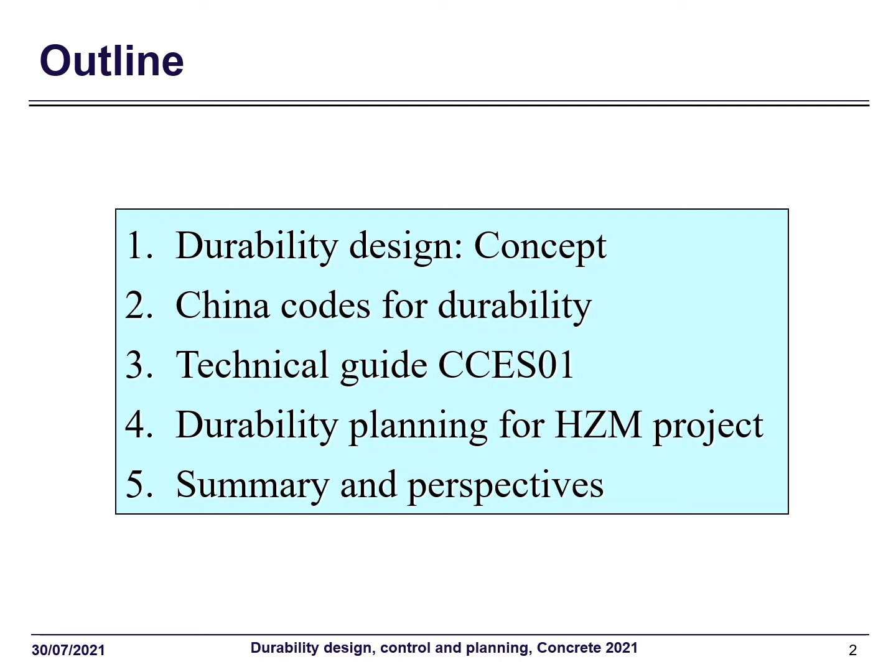I will talk about durability design, control, and planning for concrete structure from our practice in China. Here is the outline: I will begin with fundamental concepts in durability design, then continue on China code for durability, then focus on a review of a recent technical guide of durability of concrete structure called CCES01, and as an application give a brief review of the durability planning for the Hong Kong-Zhuhai-Macau Sea-Link Bridge project. In the end, I will summarize my talk.

Let's begin with the concepts. I think this figure can best illustrate the idea of durability design. Imagine when we have some durability problems, our structural performance decreases this way. Here we have a minimum acceptable level for this performance, called durability limit states. The intersection point, we can measure duration for this intersection point, that is the service life with respect to this performance. So on this figure, the three fundamental concepts for durability design are all present.

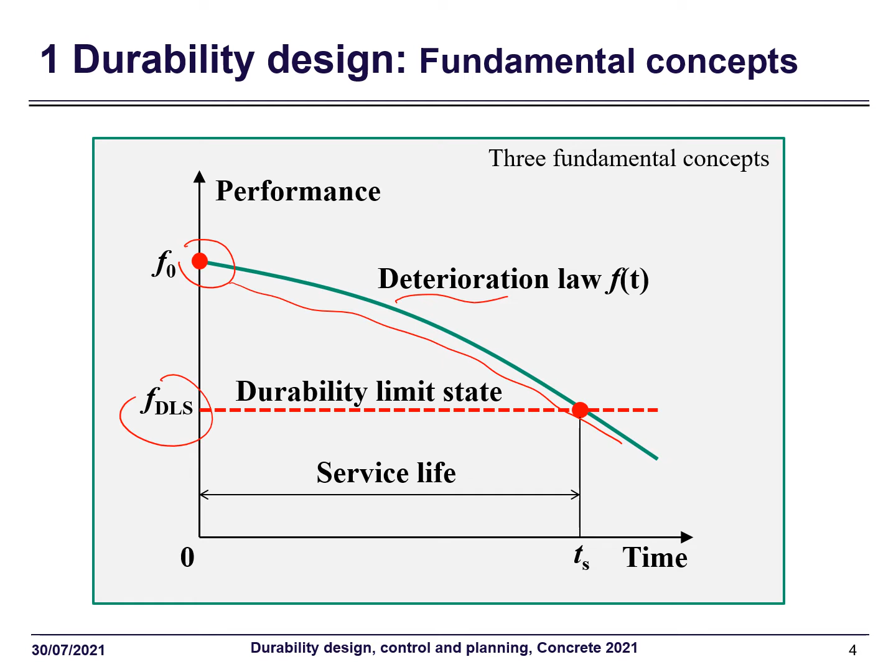That is: deterioration law, durability limit states, and service life. If we make the design, we begin with the prescription of design working life, service life. The prescription of design working life is not a pure technical issue. It is also determined by other aspects like economic consideration, legal, ecological constraint, etc.

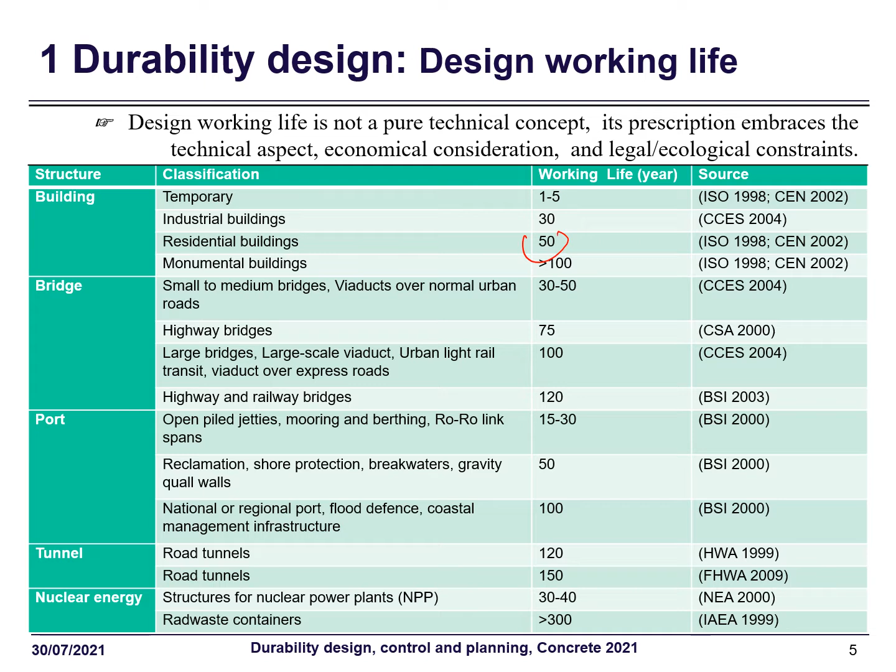On this table, I've gathered the numbers for design working lives for different civil structures from different active codes all over the world. You can see that on average we need 50 years for civil buildings, and for tunnels and this kind of infrastructure, we prescribe more than 100 years.

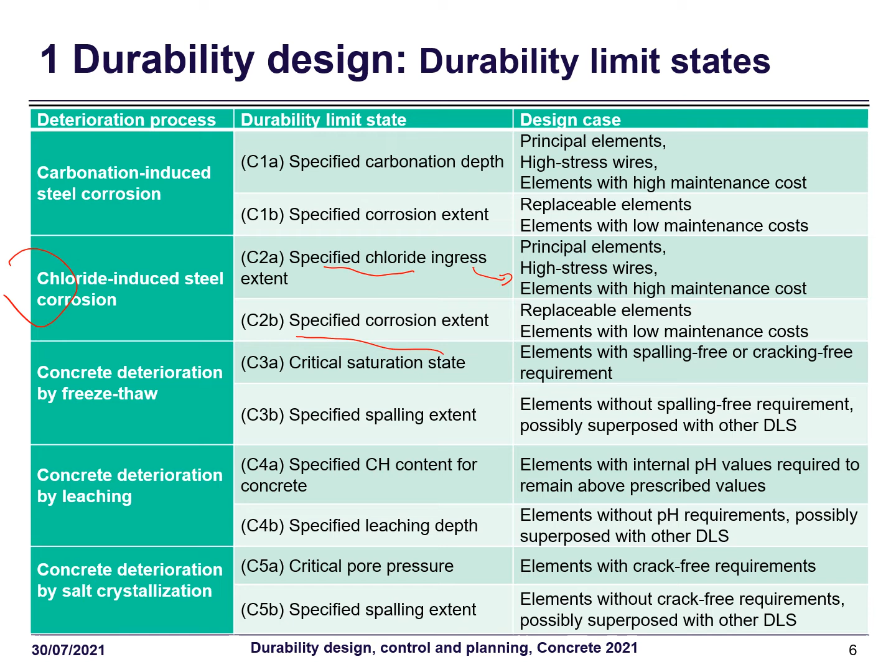Durability limits is the acceptable level with respect to the deteriorating performance. On this table, I list the possible durability limit states for main durability processes. I take chloride-induced steel corrosion as an example. You will see that normally we have an early state like specified chloride ingress extent, and a late one, specified corrosion extent. Normally the early state applies for principal elements, high stress wires, or elements with high maintenance cost. The late state is usually prescribed for replaceable elements or elements with low maintenance cost.

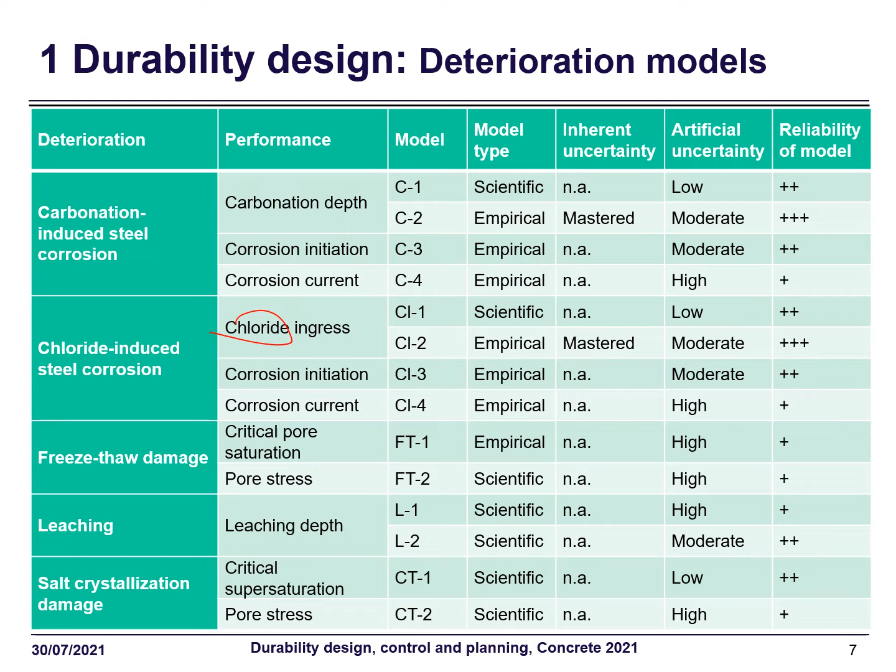And if we want to quantify the deterioration law for performance, we need models. A good model needs firstly to be correct, secondly to be quantified for its uncertainty. If we use these two criteria, we'll see that although we have a lot of models proposed in literature, reliable models are not that many. So for now, we can say that for chloride ingress and carbonation depth we have good models, not for other processes.

The approach for how to perform durability design: the first approach is prescription or deemed-to-satisfy approach. In this approach, we start with design service life, we start with environmental action classification. We do not calculate the deterioration, we just use the classification, and then we use this deemed-to-satisfy approach, normally represented by a series of tables.

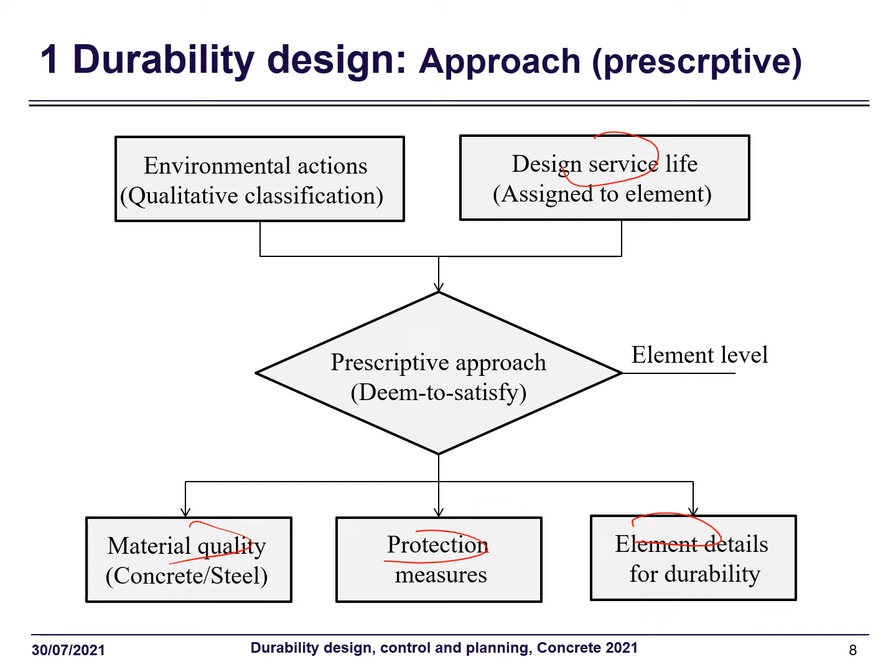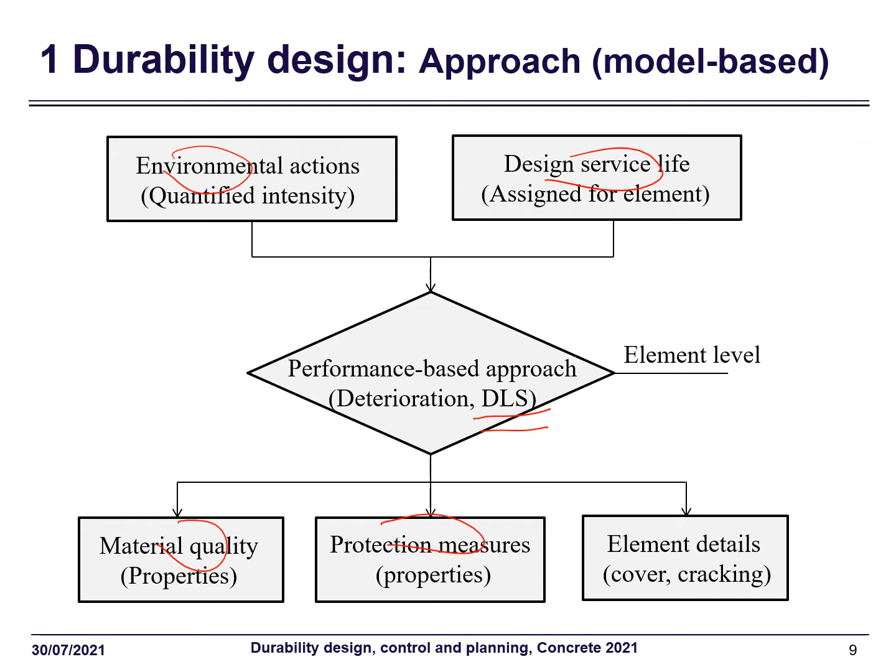From these tables we derive directly the requirements on material quality, protection measures, and element details. And if we have models, we can perform model-based or performance-based design. That is, we know the design service life, we can quantify the environmental actions, and then we use the model with respect to clearly defined DLS. From the result, we derive the material quality, protection measure, and element details.

Today there is a transition ongoing. For a long time we regarded concrete as the only valid barrier or resistance to environmental actions. But recently we have a lot more new materials, protection materials, or technical measures to protect, for example, the embedded steel against corrosion together with the concrete cover. For example, we can apply coating or sealers on the concrete surface. We can use inhibitors to reinforce the concrete cover against corrosion, and we can strengthen the concrete-steel interface, or we can use directly weathering and stainless bar to protect the steel bar.

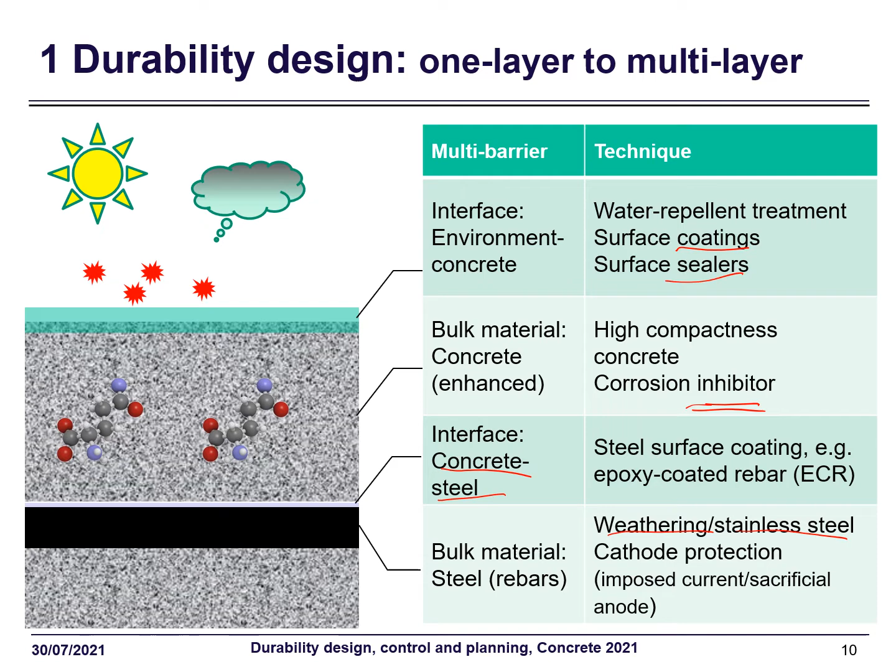So this is a transition ongoing, and we all know that to maintain the durability performance of a structure during a long service life, we need to perform maintenance works. It's very similar to DRS - we need to specify the deterioration level of maintenance, DLM. If we have a low DLM, that means we have lower quality requirement and fewer interventions. If we have a higher DLM, that means we have a high quality requirement and a lot more intervention times.

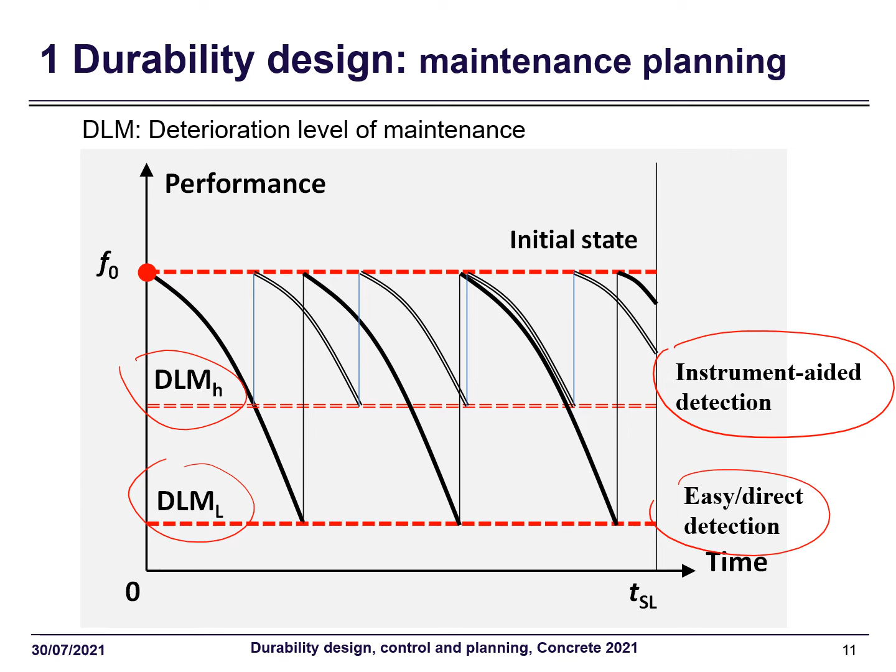Moreover, we should note that if we take a low DLM, that means at the same time it's easy to detect the limit states. If we take a high DLM, that means we normally need instruments or sensors to tell us when to start the intervention.

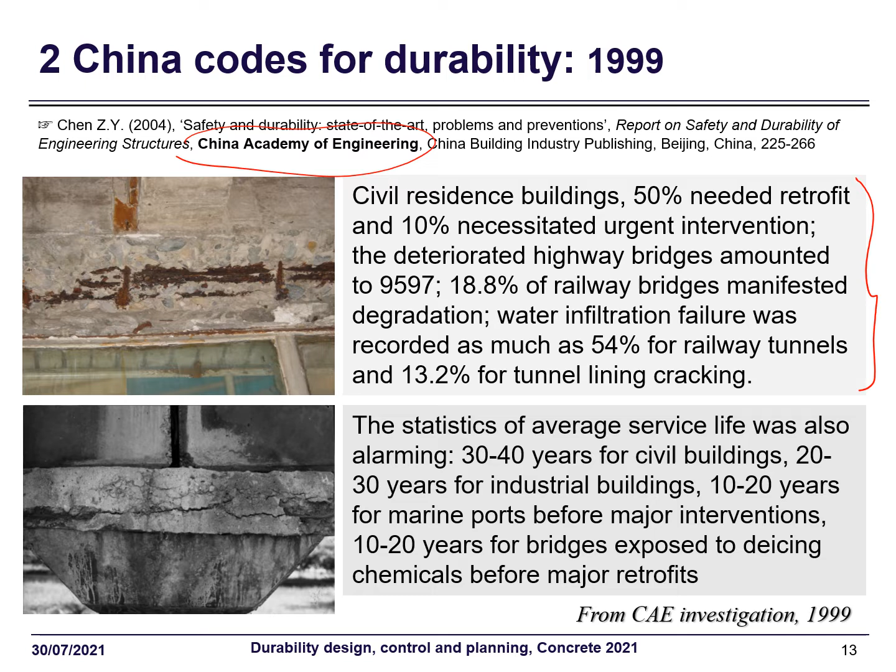And then I will talk a little bit about the evolution of Chinese codes. All the stories started in 1999. In 1999, China Academy of Engineering carried out a very serious and comprehensive investigation on the service states of all civil structures. Here are the results, I won't read out the numbers, but the situation is far from satisfactory.

The situation is also very urgent, knowing that at that time we had a very, very large scale of infrastructure to construct. So there was urgent need to increase the service life, at least for new structures. That is the reason for being of our first national guide to durability design and construction of concrete structures, CCES01. And the objective is very clear and urgent: to provide a method for durability design and technical measures in construction to increase the service life of concrete structures.

So here I list the main content of this guide. You can see it included environmental classification, service life, design procedure, requirements on the concrete materials, detailing and crack control, construction requirements, and additional protection measures. In the appendix, we have the test method for durability.

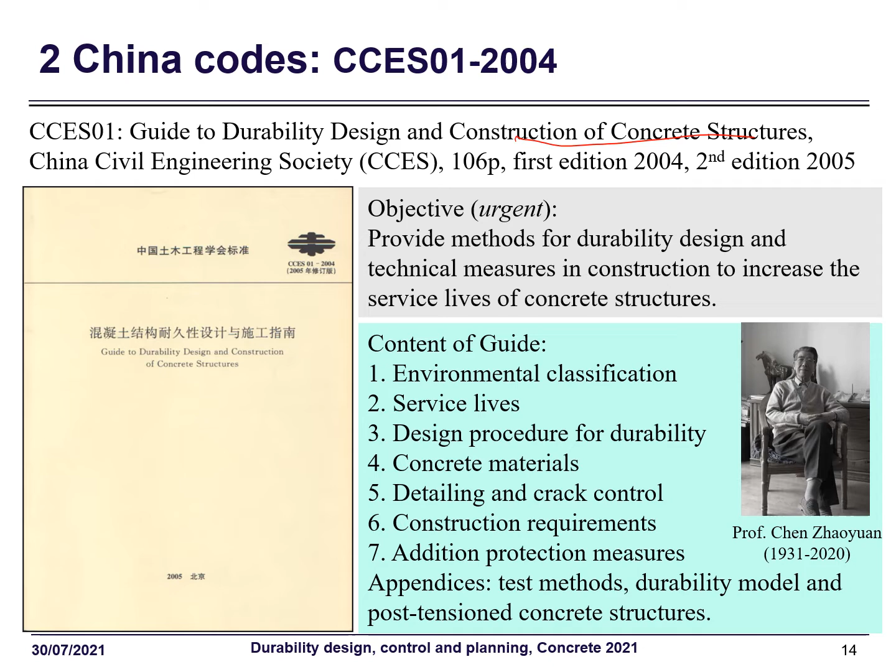And here I would like to pay tribute to one of our pioneers in durability research study and code drafting. It's Professor Chen Zhaoyuan, who passed away last year. It was him who led all the drafting of this series of codes and standards.

And soon after this guide, we formalized the requirement into a design code. That is the design code for durability of concrete structures, finished in 2008. You see that we formalized the requirement into design basis. Here we have the environmental classification, service life, etc., and the durability requirements for all different kinds of environments, and also some requirements for post-tension concrete structures.

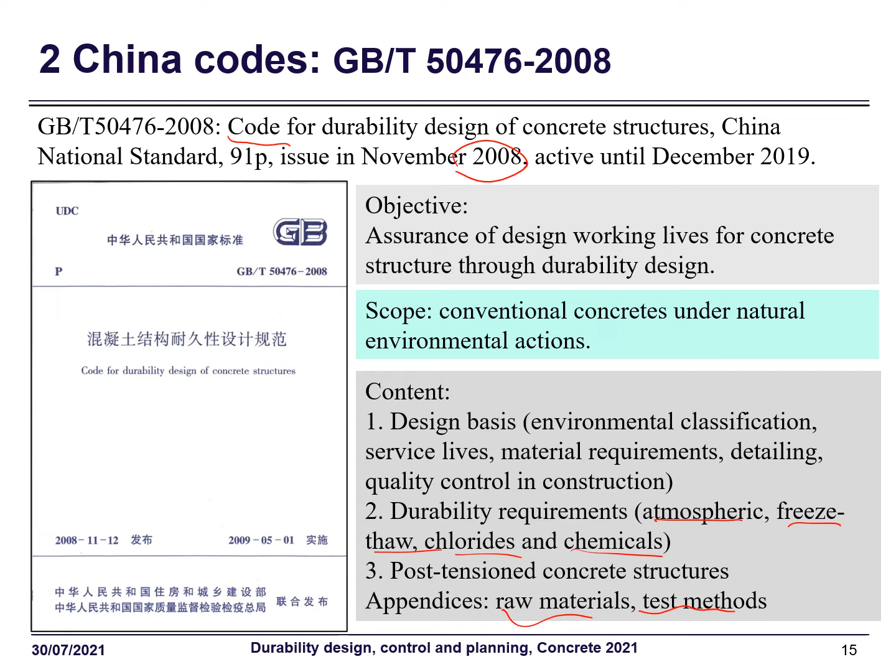So in the appendix, we have raw materials requirements and test methods. And I believe this code promotes very much the durability design work in China, and I think it contributes actually to the increase of service life of newly built structures.

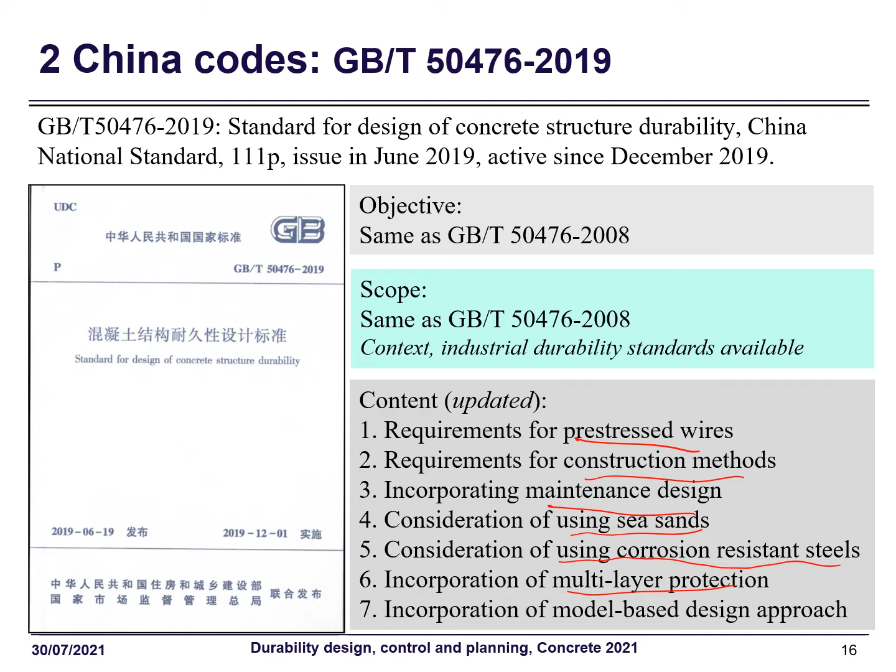After 11 years of use of this national code, two years ago we updated the content of this code with requirements for pre-stressed wire, construction method, maintenance design, use of sea sand, using corrosion-resistant steel, multi-layer protection, and model-based design approach. And after this drafting, we thought we'd turn back to the mother document of all these codes, that is CCES01.

Today, we think that instead of the design code, it's better to leave a document to provide technical solutions to durability of concrete structures. And we just finished the draft work, and in this draft we updated the specification provisions for durability on the basis of state of the art knowledge. We push forward performance-based design, and we provide a systematic solution to assure durability design working life through durability planning.

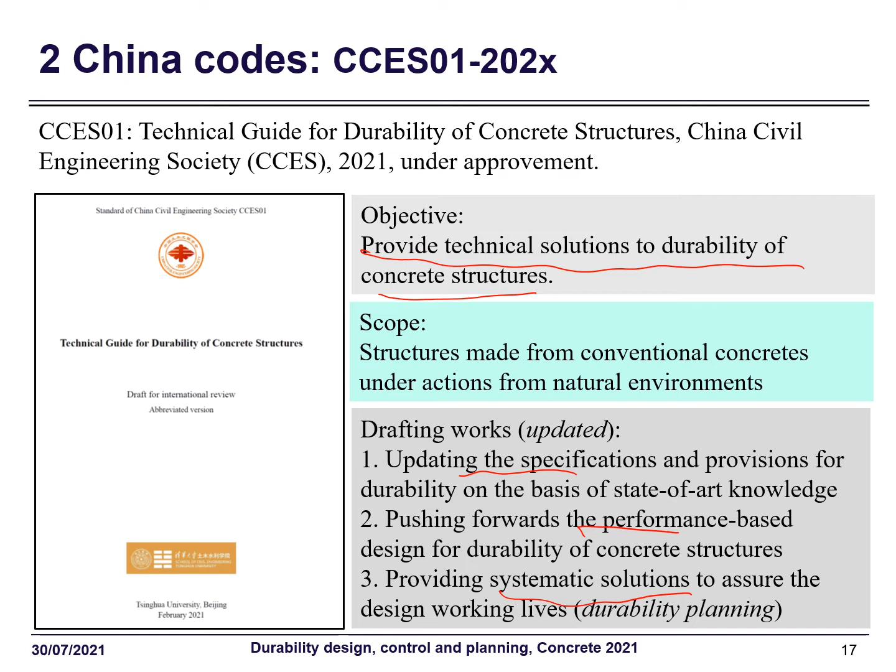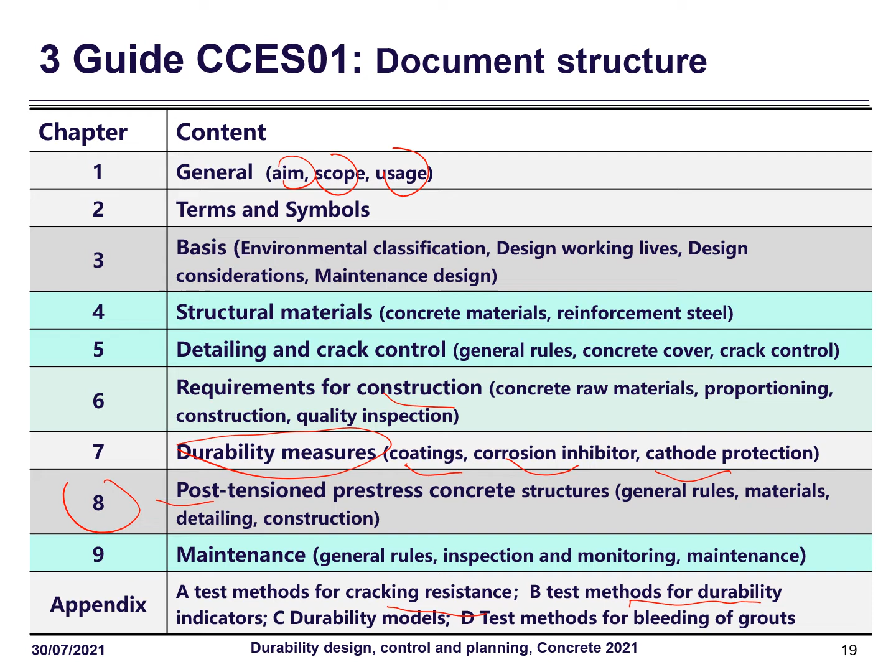And in the appendix we have test methods for cracking resistance, test methods for durability indicators, durability models, and the test method for bleeding of grouts.

In the basis, we set up a general framework to assure durability here by Article 3.1.1. That means, to assure the durability of concrete structure, we should adopt technical requirements and considerations in design, construction, and service phase. In the design phase, in durability design, we should determine the material properties, structure details, and additional protection measures, etc.

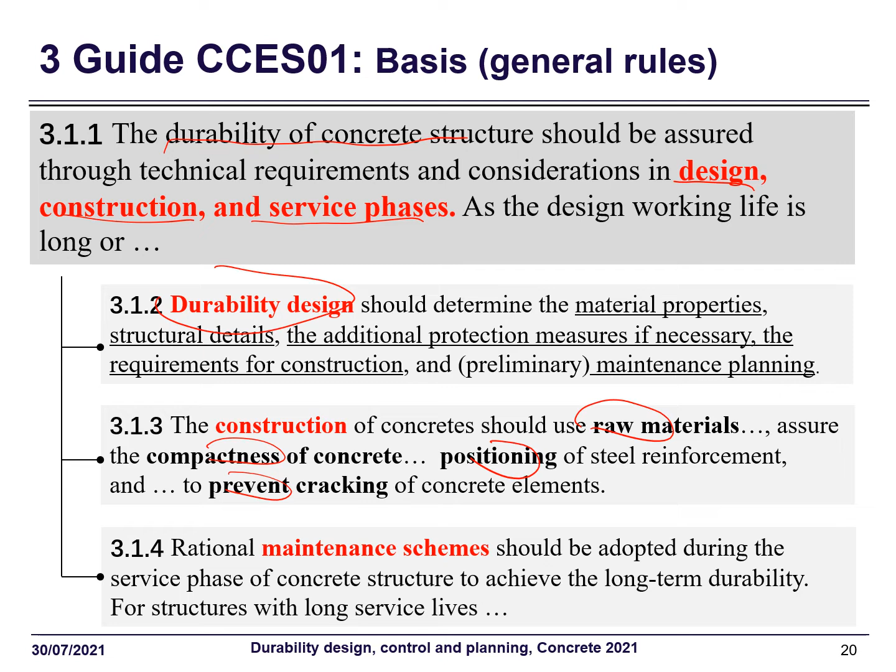And during construction, we should make quality control, especially for durability, including control over raw materials, ensuring the compactness of concrete, positioning of steel reinforcement, and preventing cracking. And during the service life, we should install a rational maintenance scheme. That is the framework to assure durability in a life cycle sense.

And then this CCES01 divided the environmental actions into 5 environments based on the deterioration mechanism. The atmospheric environment refers to steel corrosion induced by carbonation. Freeze-thaw refers to concrete damage from frost action. Marine and de-icing salt sources, or both, refer to steel corrosion from chloride ingress, but from different sources. And the chemical environment refers to concrete damage by several mechanisms, including chemicals in groundwater and soil, salt crystallization, and air pollutants.

And for each environment, we further specify the intensity of the action.

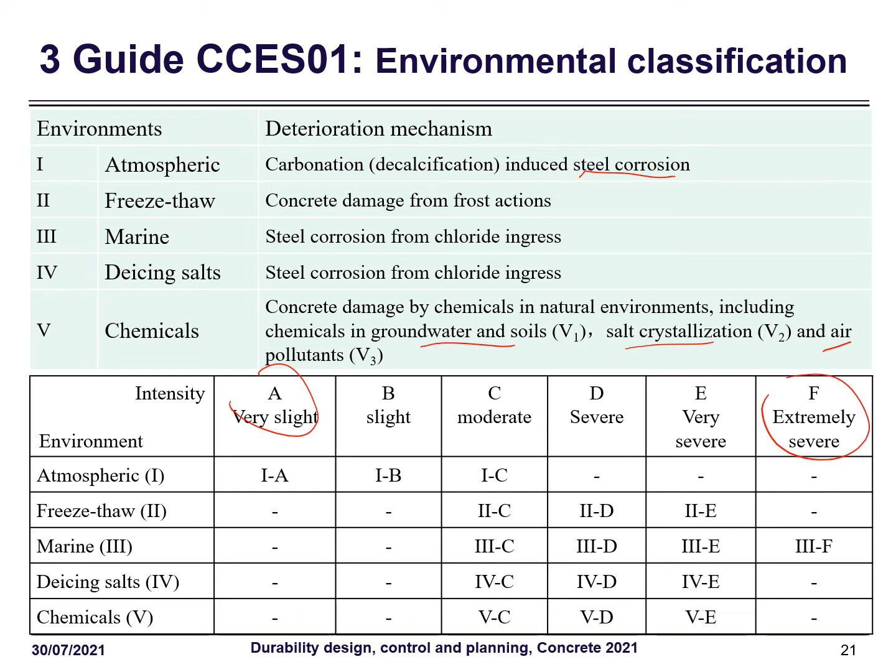The intensity has 6 classes, from A, very slight, to F, extremely severe. From this table, you can see that each environment covers 3 or 4 different intensities.

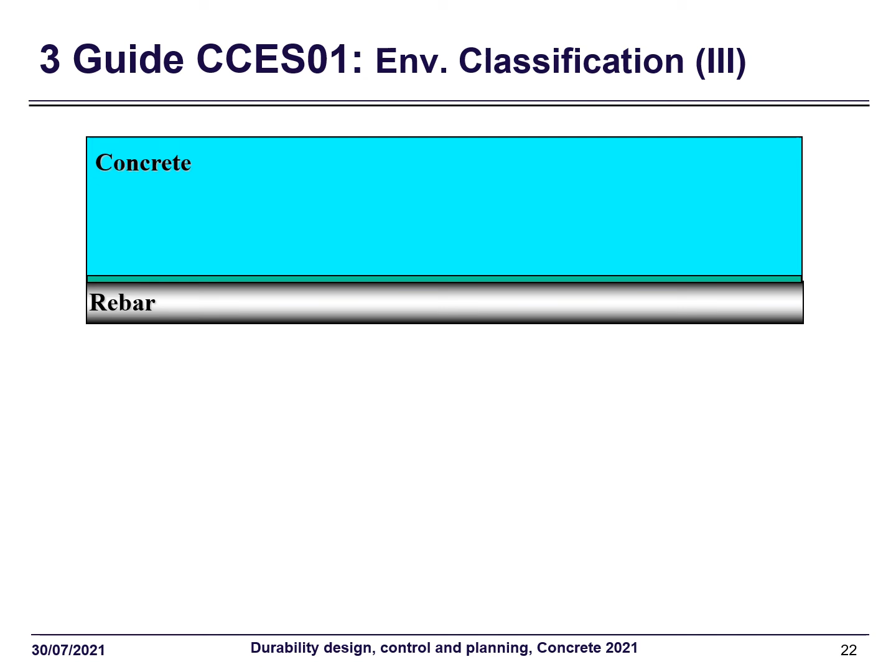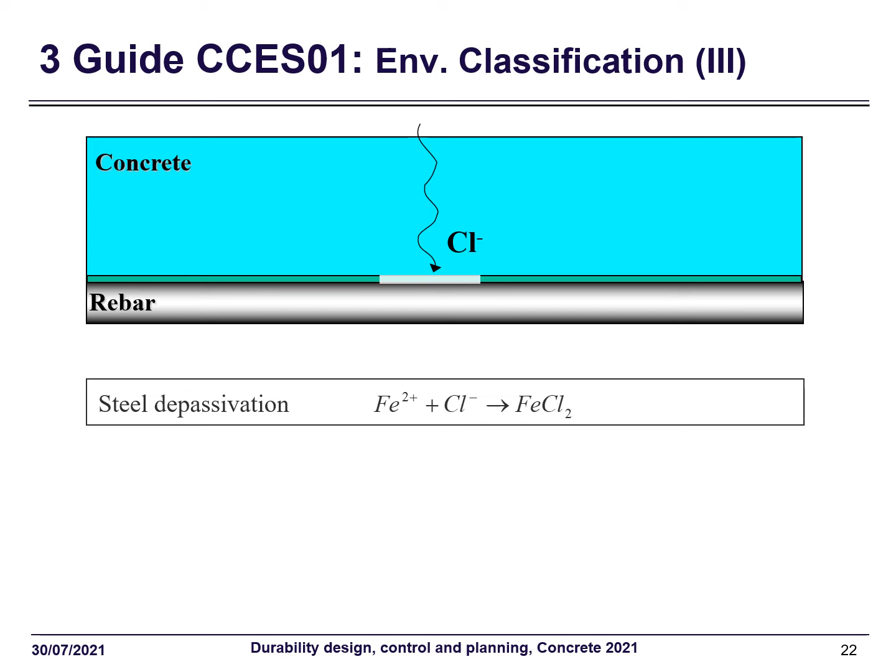I will give an example of how we quantify or assign different grades of intensity to an environment, marine environment 3, for example. We know that in this environment, the risk comes from chloride ingress to the surface of the steel bar, and then the steel becomes depassivated, leading to the electrochemical reaction of corrosion. That means we have the anode reaction and cathode reaction. To make it happen, we need some conditions: first is sufficient concentration of chloride on the steel surface, and oxygen and water to make the cathode reaction possible.

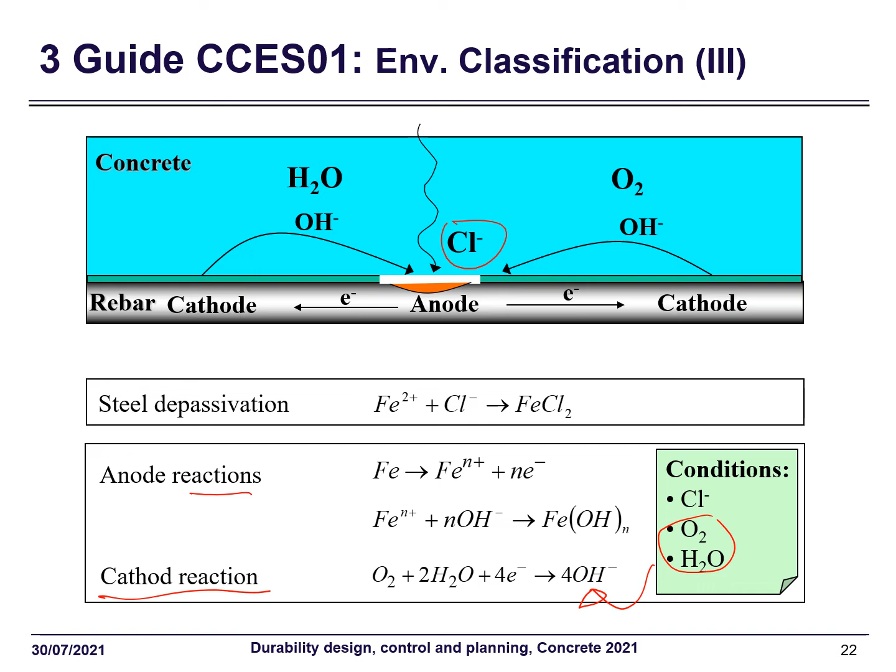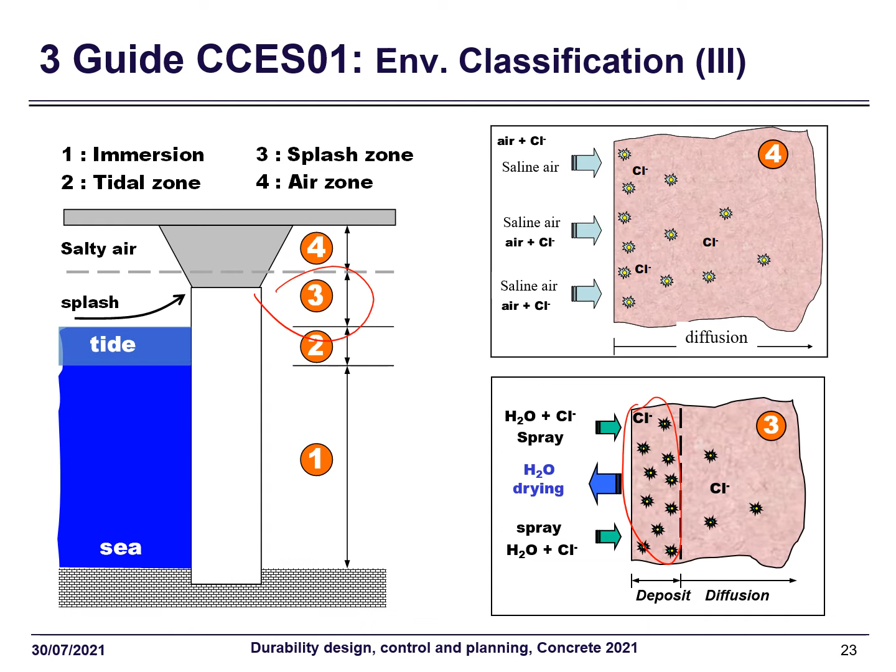If we apply this mechanism to a marine exposed structure, in the splash zone of exposure, at the surface we have drying-wetting action, leaving very high chloride concentration on the surface. In this zone we also have alternating availability of oxygen and water, which are very favorable to corrosion. On the basis of this analysis, we look at environmental factors including chloride exposure condition, humidity condition including drying and wetting, and temperature.

For example, for permanent immersion in seawater or water-saturated soils, we assign the lowest grade, III-C. It applies to a pier, bearing platform, or foundation immersed in water, because in this exposure there is very little oxygen to support continuous corrosion. On the contrary, if we have exposure to tidal splash and run, we have much higher intensity. In the tropical climate plus splash and run zone, we attribute the highest intensity, 3F.

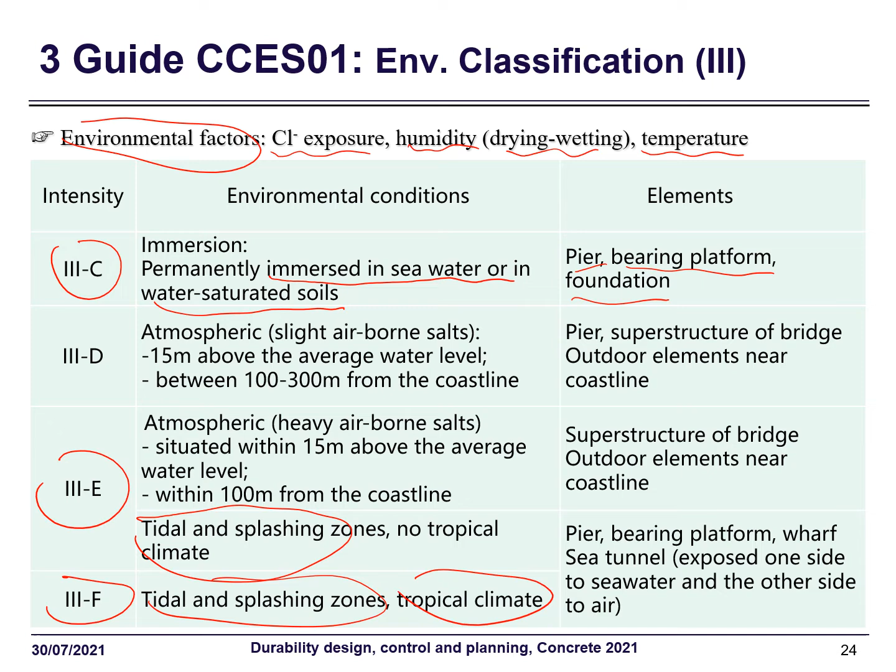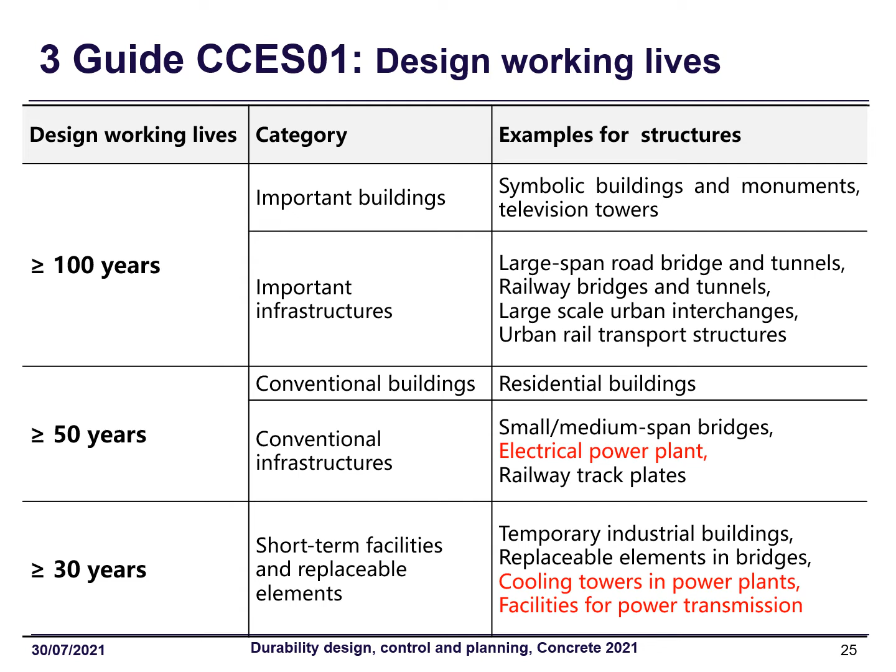For design working life, here on the table we gather the requirements on design working life for different buildings and constructions. We divided them into 3 categories: 100 years, 50 years, and 30 years.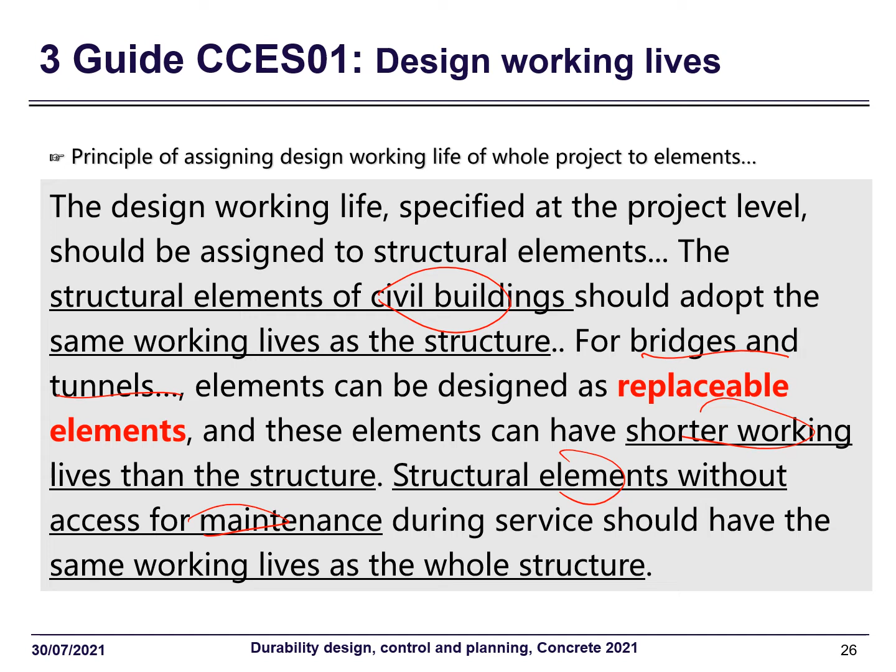For design working life, there's one remaining question: how to assign the design working life of the whole project to its elements. We think for civil buildings it's the same, and for bridges and tunnels, if we have replaceable elements, those elements can have shorter working lives. For elements without access for maintenance, which are very difficult to maintain, these elements should have the same design working life as the whole project. That's the principle.

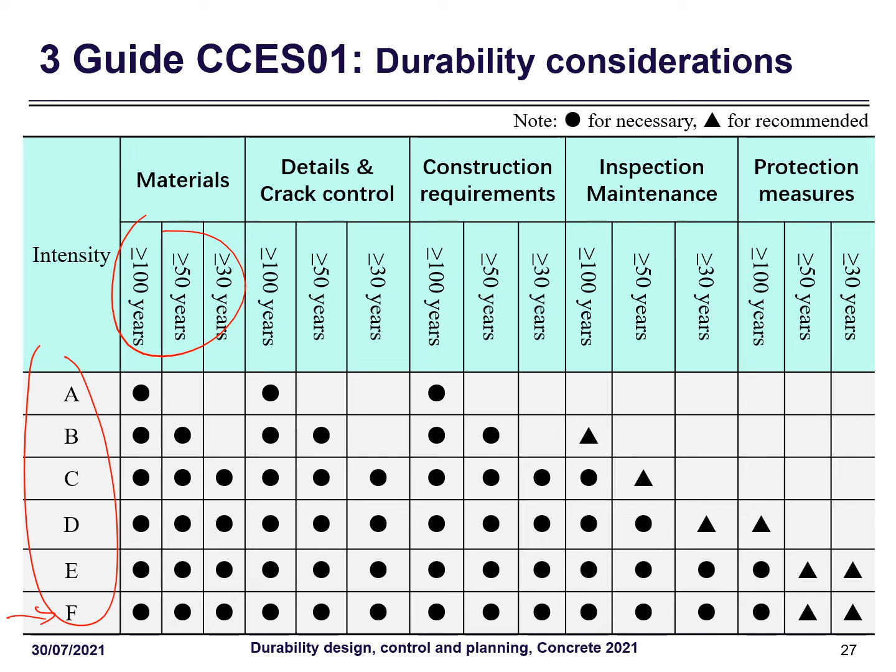The last thing we consider in the design phase is maintenance design. Maintenance is very necessary, and maintenance design should take its starting point as the end of construction. What maintenance design will do is determine the rational techniques and intervention frequency or scheme for maintenance, considering the service condition and performance deterioration of structural elements.

Here we show two cases of different intervention schemes. One is called the real-time scheme. That means if you have three groups of elements which deteriorate at different rates, real-time means whenever a group reaches its DLM, we start the maintenance.

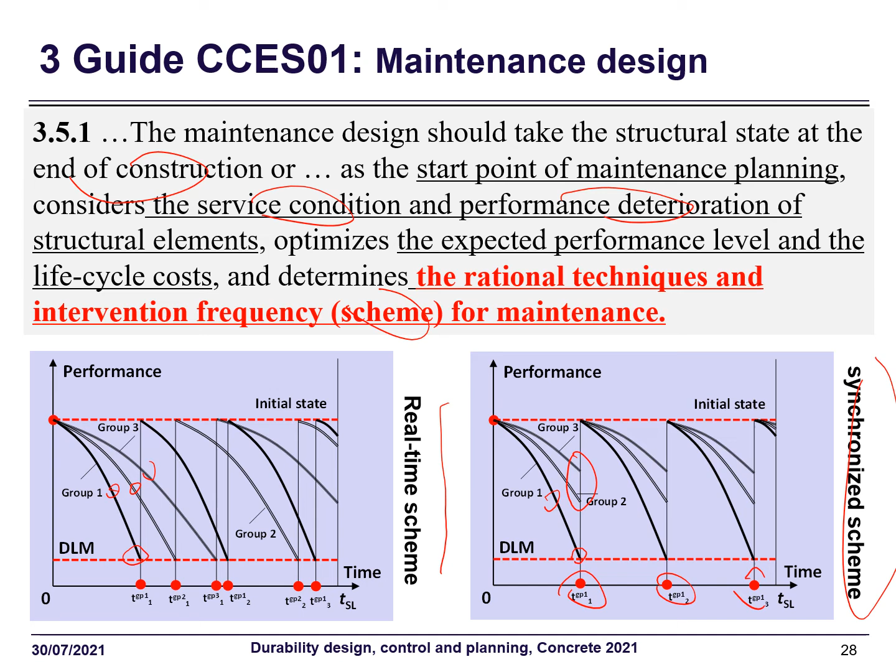The synchronized scheme is another organization. That means we look at the fastest deteriorating group, group 1. Once group 1 reaches DLM, we start maintenance for all the groups. For this scheme, we use up all the potential durability performance in some groups, while in other cases we waste a bit of the potential, but the advantage is that the intervention times in this scheme are fewer. Perhaps that's also an advantage.

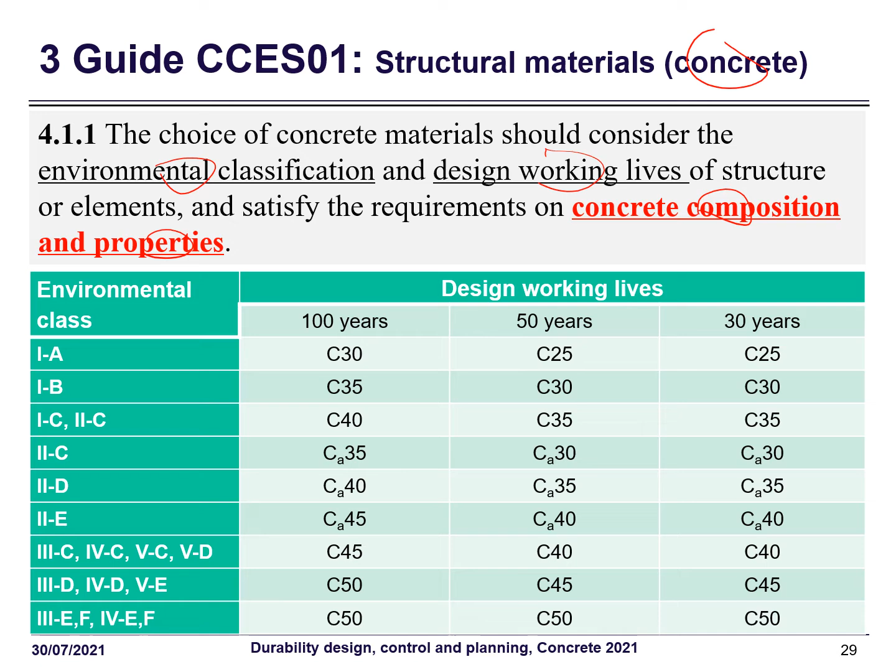We continue on to chapter 4, on structural materials. For concrete, the requirements are formulated on the basis of environmental classification and design working lives, covering both concrete composition and properties. The most important property here is the minimum strength for concrete, and in parallel, we introduce the concept of durability indicators like chloride diffusivity, water permeability, and gas permeability.

We think that whatever the phenomena of durability is, it more or less relates to gas transport, ion transport, and water transport. So whatever durability model you use after design, you can more or less transfer your requirement parameter into these three parameters.

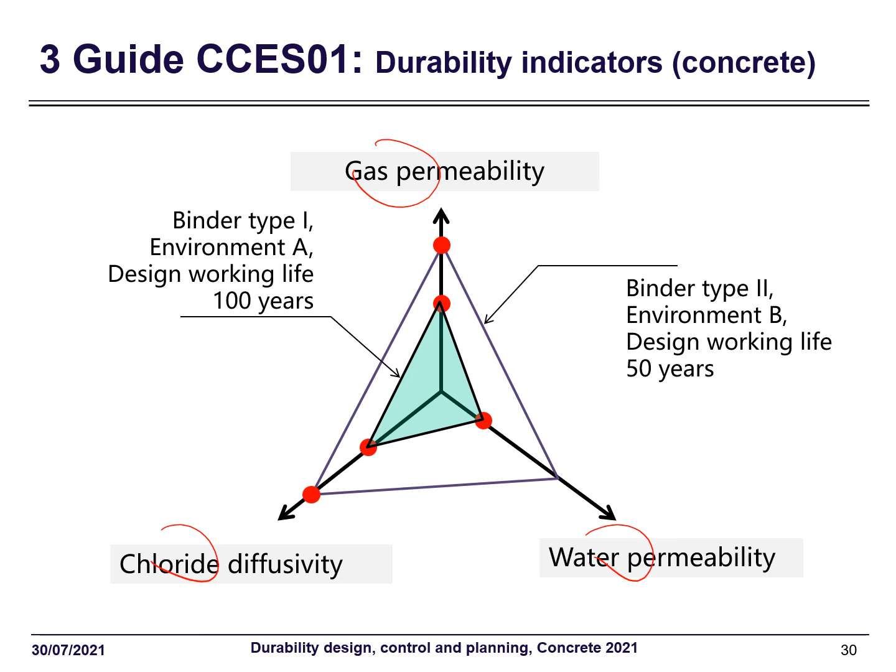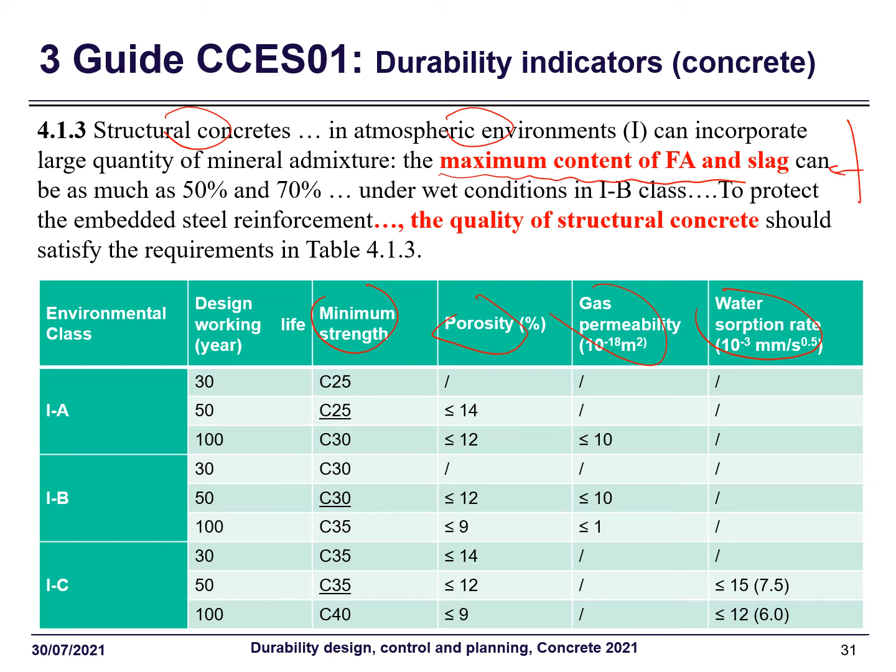Following this line, we formulate the requirements for structural concrete in atmospheric environments. On the table, you can see we use the parameters of porosity, gas permeability, and water sorption rate, plus minimum strength—that's the property requirements. In parallel, we also have requirements on composition, like maximum content of fly ash and slags. So it's a mixed approach between deemed-to-satisfy prescription and performance-based requirements.

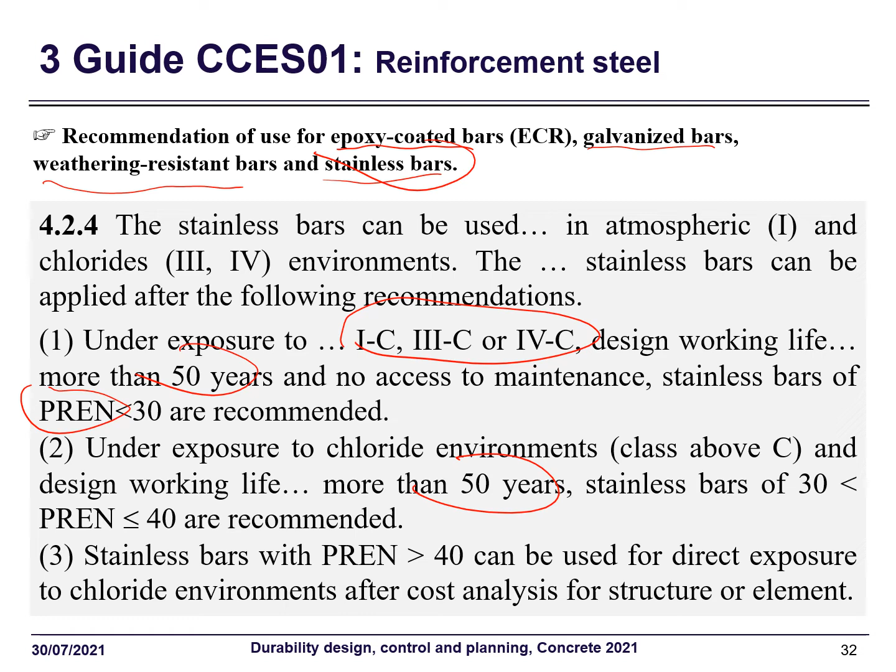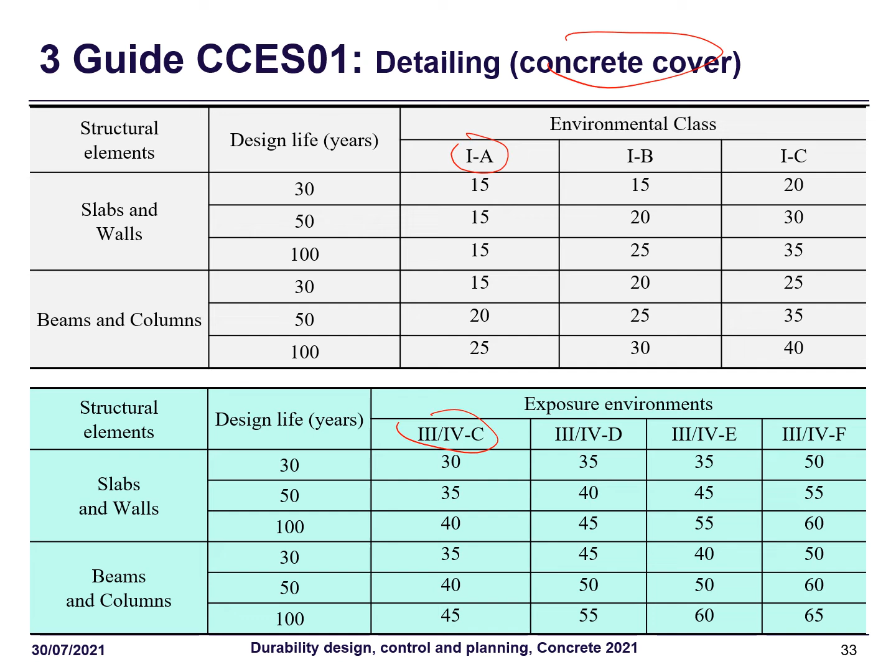And we continue on the details. The most important detail to protect against steel corrosion is the thickness of concrete cover. Here we gave the requirement on concrete cover thickness for environment 1 and environment 3 and 4. They are all related to the protection of steel corrosion. The values here are very consistent with the Eurocode requirement.

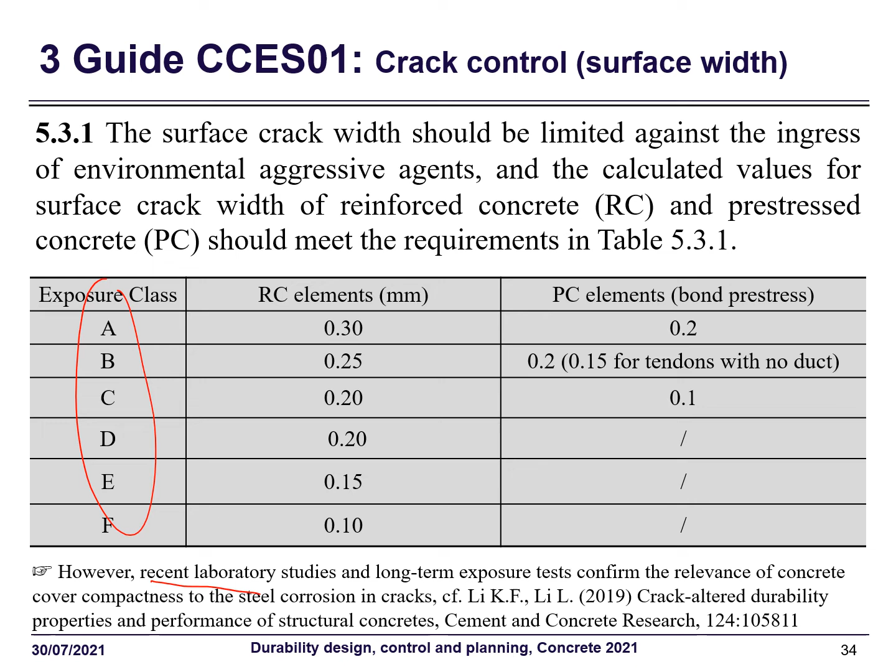Another control is the crack control with respect to durability. Here on the table, we limit the surface crack width opening with respect to exposure classes. It's also very similar to the requirements of Eurocode, but from recent laboratory study and long-term exposure test, they confirm that the crack surface opening width is not very relevant to corrosion in crack. They also confirm the relevance of concrete cover compactness. So we think that with further study, perhaps this requirement on surface opening width will not be so important.

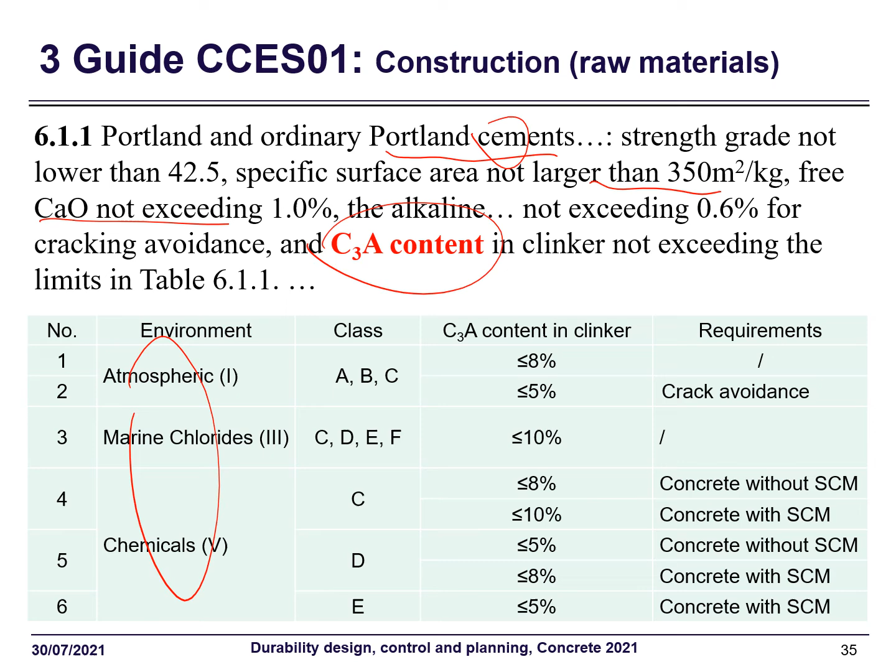And then we'll continue on the requirement of construction. On construction, first is on the raw materials. Here I give you the article concerning Portland cement. You can see that we put some requirement on the characteristics and composition of the cement, and some environmental-dependent requirement on C3A, for example, with respect to the environmental type and exposure classes.

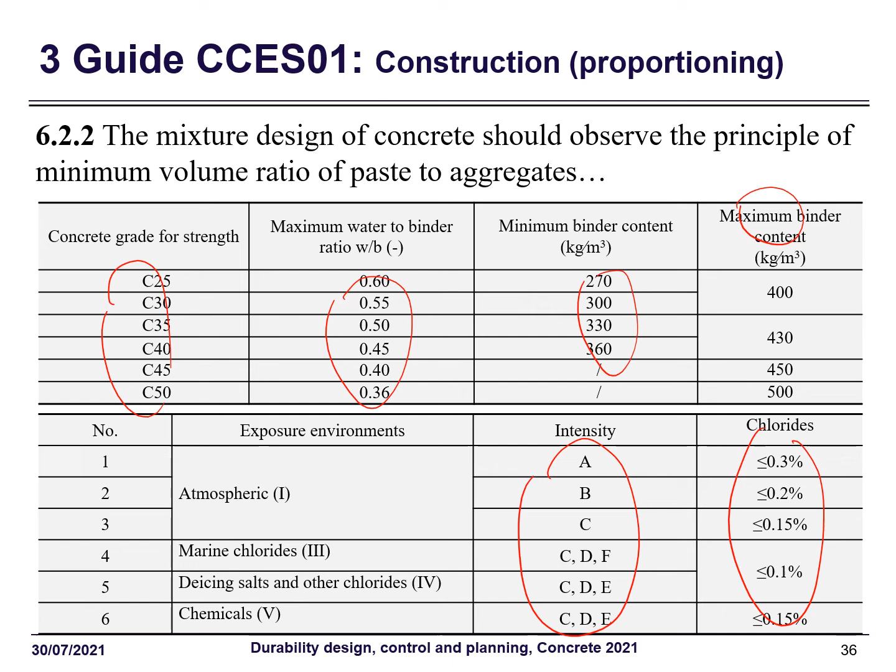And then we give some instruction or requirements on the proportioning. For example, for different grades of concrete, we impose the maximum water to binder ratio, the minimum and maximum content of the binders. We impose also the limitation of chloride content with respect to the different environmental action, type, and intensities.

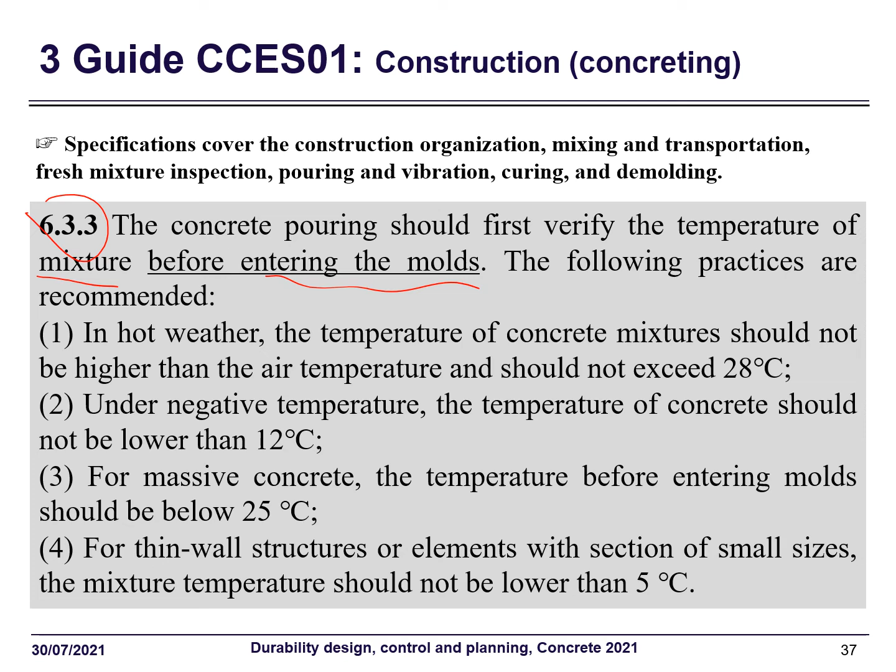And for concreting, the articles are very detailed. Here I just show you it covers from the construction organization until the curing and demolding. Here I just show you how we required the temperature of the concrete mixture before entering the mold, because it's one of the important factors to determine the early risk of cracking in concrete construction. Here you can see some temperature is given.

And then we put the requirement on construction inspection. The reason for this is, whether we use durability indicators or not, they are all parameters based on laboratory test. The real quality indicator, the most pertinent indicator, is to be measured directly on the surface of the finished members. So in that sense, we need to make the inspection of the durability quality of the hardened concrete members. In this article we just set up some basic rules to make this kind of inspection, for example, to measure the concrete cover thickness, compactness, air content, average void spacing, and some transport property.

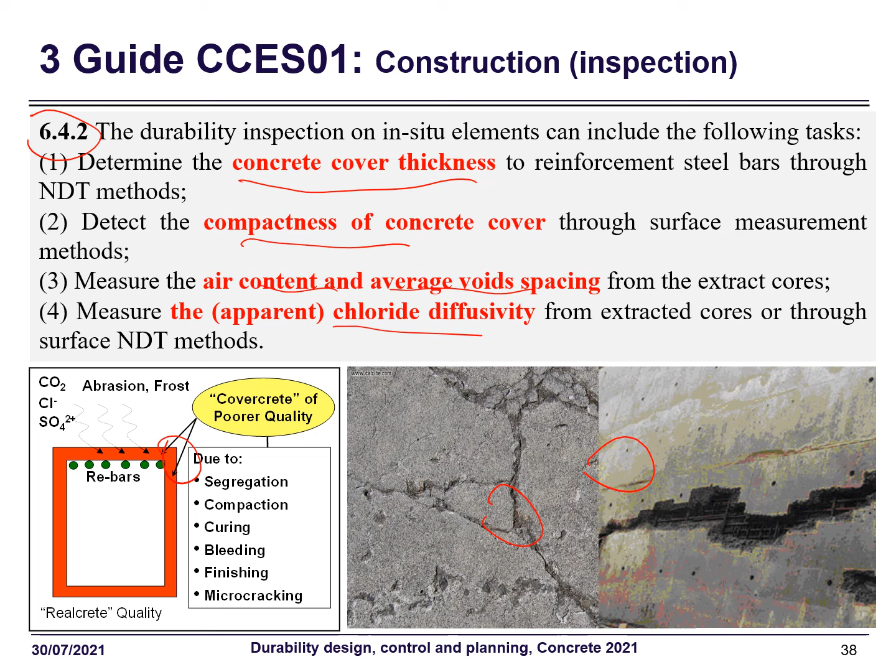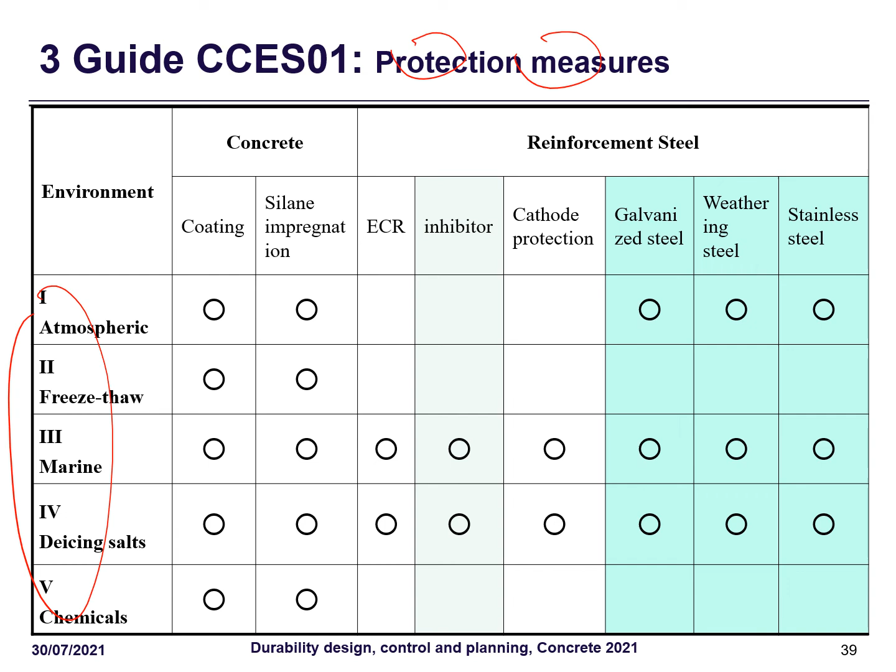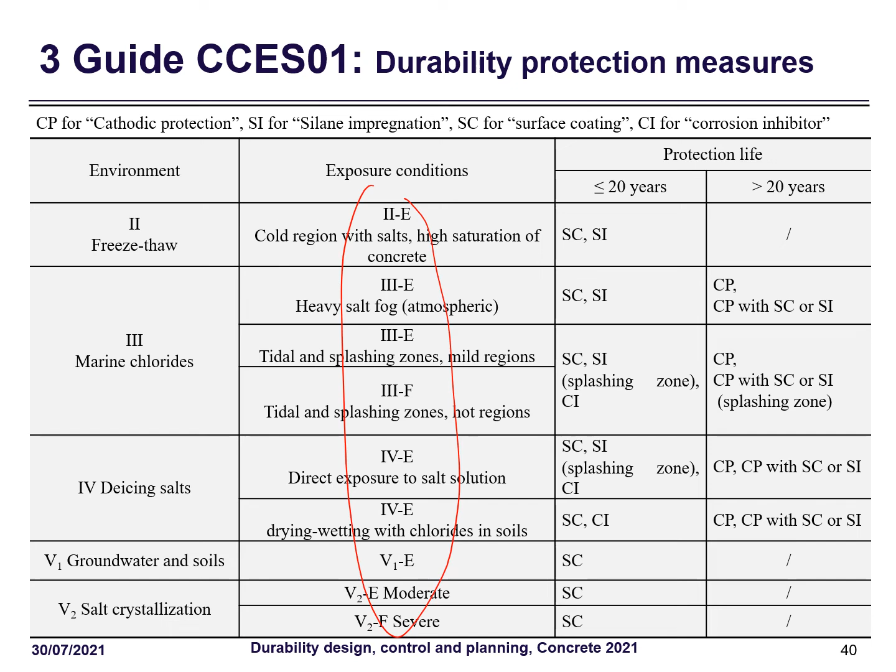And then in chapter 7, we prescribe the protection measures. That means the technical measures and materials to support the multi-layer protection in this guide. Here, in terms of the different environmental types, we proposed different combinations of possible protection in different exposures. For example, on this table, we gave the detailed possible solutions for very serious E and F grade intensity, for protection lives less than 20 years or more than 20 years.

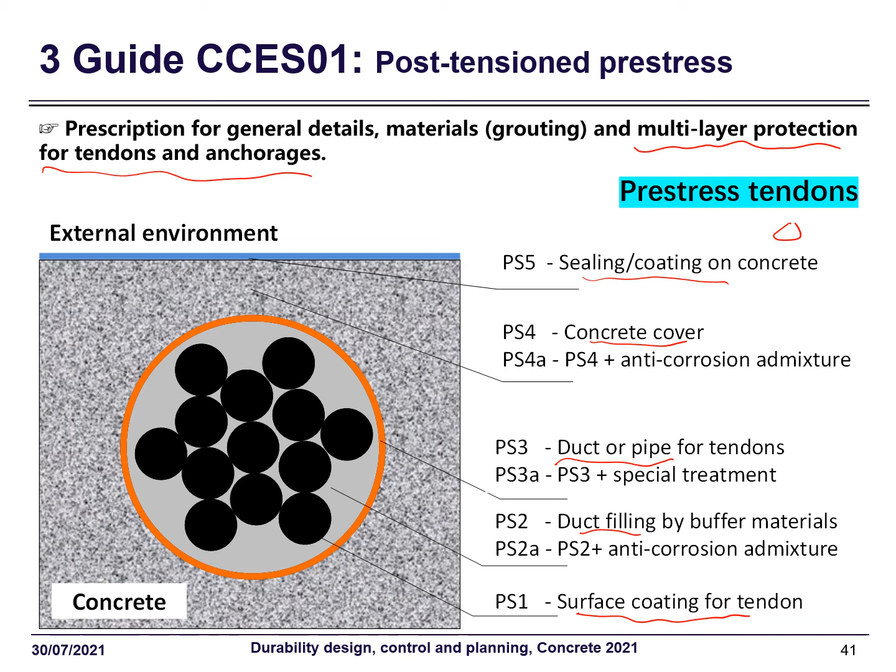These are the solutions. And in the last part, we prescribed the durability requirement on post-tension prestressed. Post-tension prestressed is special because the corrosion of this steel or strand will endanger directly the safety of the structure. So in this chapter we apply mainly the multi-layer protection for tendon and anchorage. For tendons, from inside to outside, we have respectively the protection measures as the coating for tendon, duct filling, duct or pipe, the concrete cover, and the sealing coating on the external concrete surface. On this table we attribute this combination to the different environmental classes and intensities. Generally, for the most severe exposure, you need all. For some very slight action, you need only one or two measures to counter.

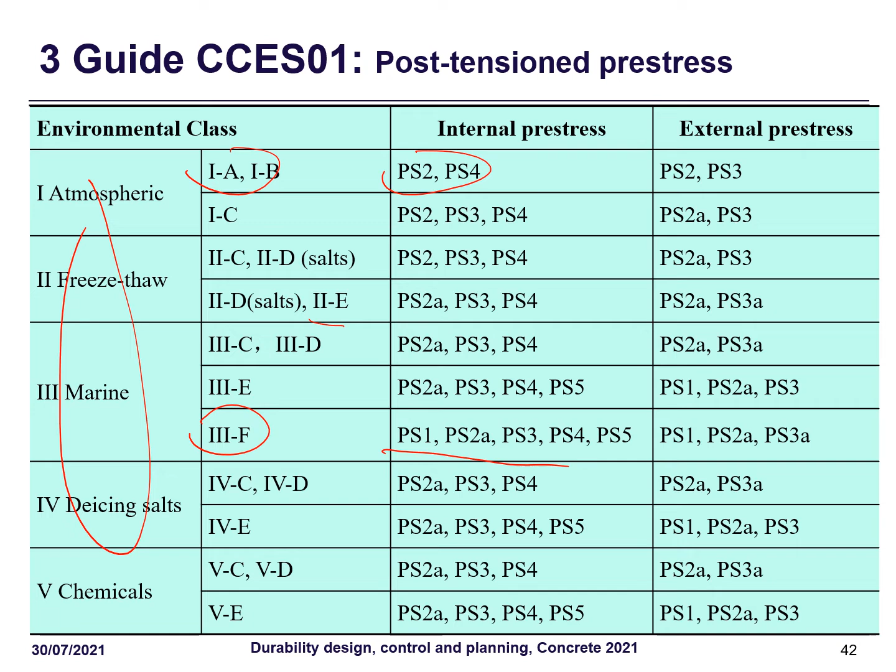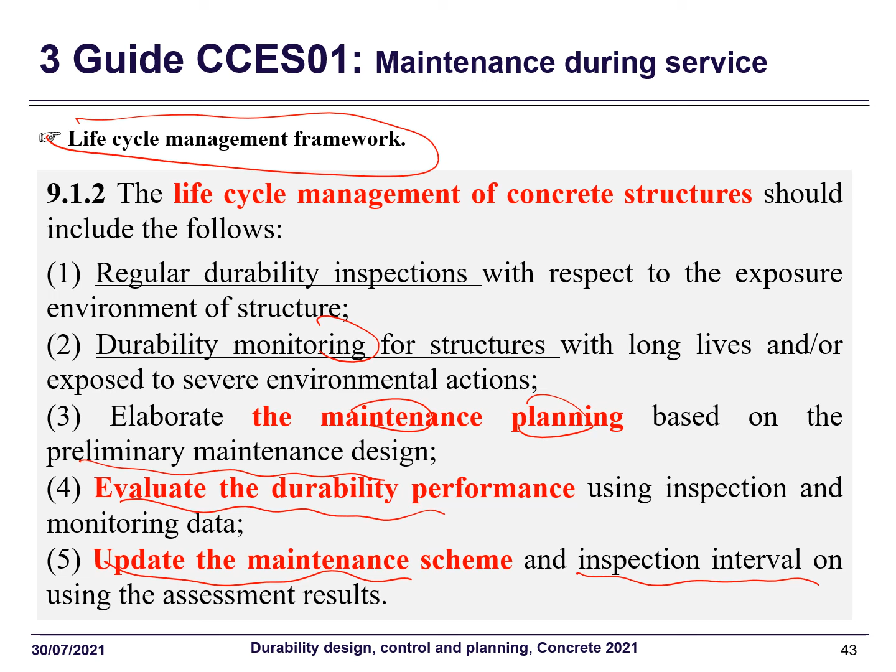So the last chapter of this guide is on the maintenance. It's written in the sense of life cycle management. In this article, you can see that the life cycle management of this concrete structure should include regular inspection, durability monitoring, and elaborate maintenance planning based on the preliminary maintenance design planning in the design phase, and evaluate the durability performance and update the maintenance scheme and inspection interval using the assessment results, which is a dynamic process.

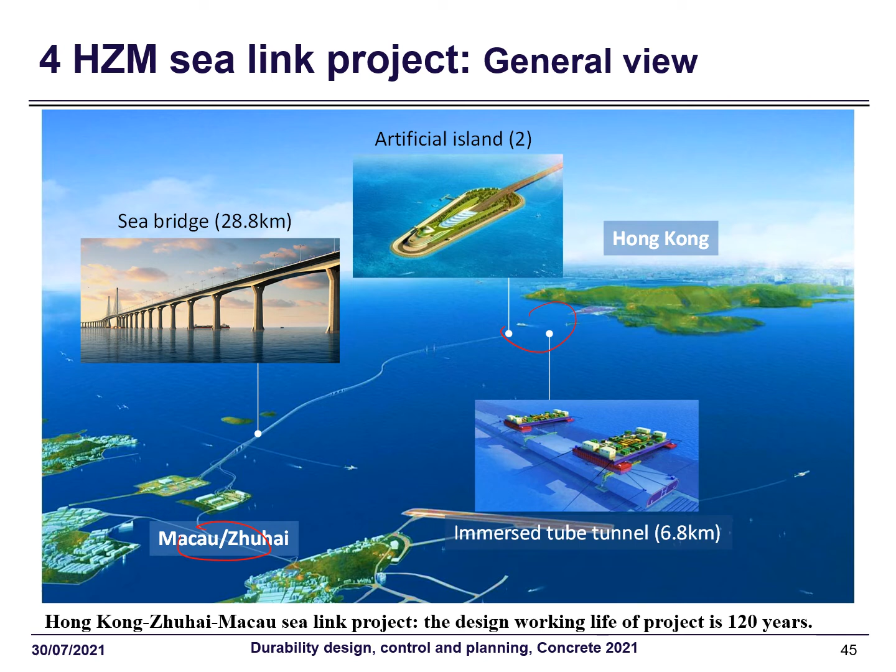So we apply these ideas to the durability planning of a large-scale sea link project. This is the Hong Kong-Zhuhai-Macau Bridge, which links Macau, Zhuhai, and Hong Kong by a huge mega project, including more than 20 kilometers of sea bridge, 2 artificial islands, and a segment of immersed tube tunnel of 6.8 kilometers. The design working life of the whole project is 120 years, and it was open to traffic in 2018. Our team was involved in the durability design of these concrete structures.

The first strategy is to divide all the durability processes into 2 groups. For the low risk groups, we control the durability risk through qualitative raw materials control. For the 2 high risk groups, we can only control the durability risk through quantitative model-based design.

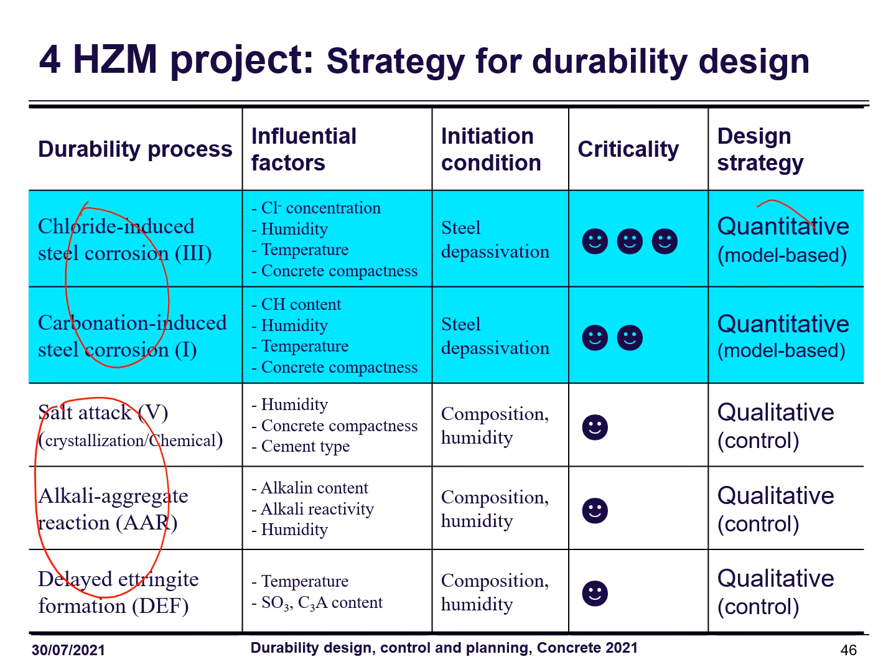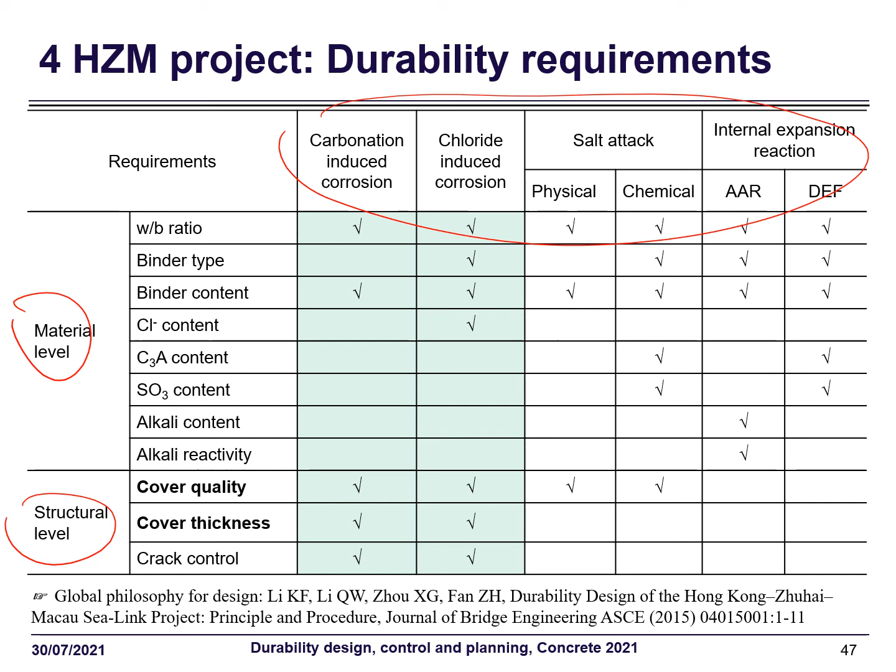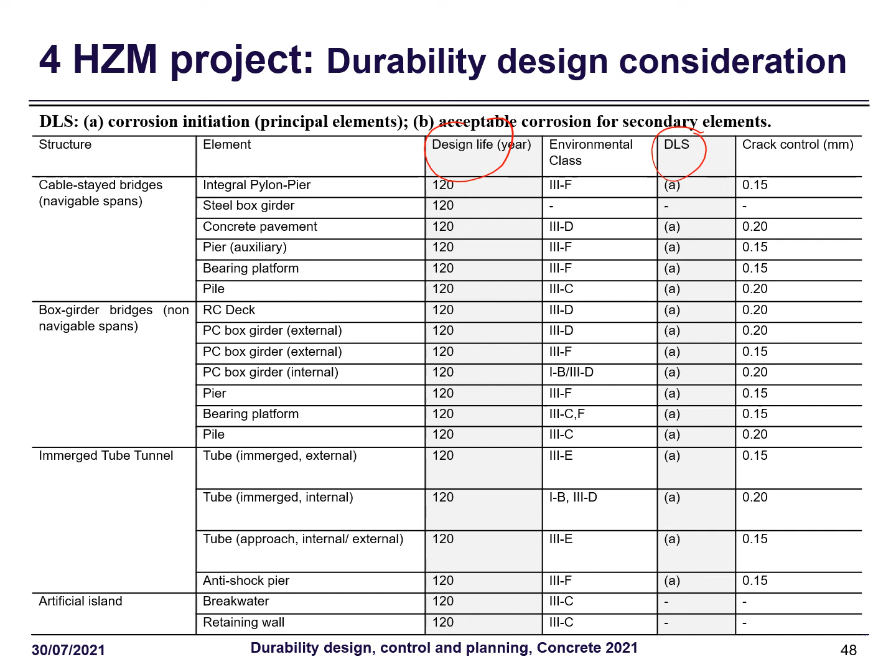Here is the durability requirement prescribed, or to be prescribed, both on material level and structural level with respect to the different processes. If we want to use a model-based approach, we need to know the design life, service life, and the DLS, and here are the choices of design service life and DLS for the main concrete elements in question.

For chloride ingress, we use model-based design. The model is like the model in DuraCrete—it's a diffusion, second Fick's law diffusion process, with an aging diffusivity, and that is the design function. But to apply this equation model to the Hong Kong-Zhuhai-Macau Sea Link Bridge, we have two problems to overcome.

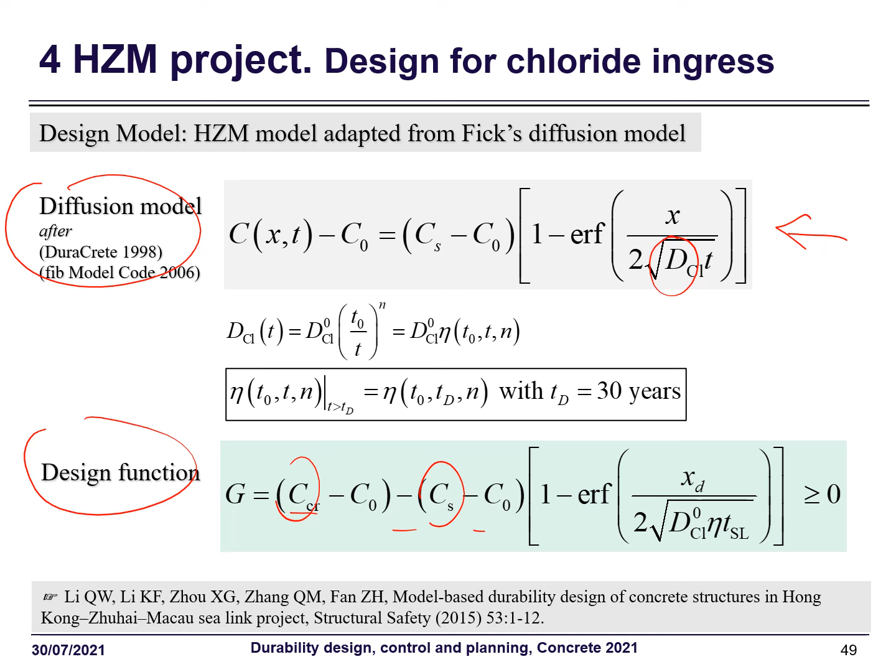The first is we have to take into account the statistical properties of all these parameters. Only in this way can we have some design margin. The second thing is these parameters are all environment dependent, so we have to calibrate this model on local data.

Fortunately, we have long-term exposure data on similar sites available to us, and using this data, we calibrate the partial factor format. We design equations from the full probabilistic formats, and here are the results.

The target reliability index is 1.3 for 120 years, and in this figure is the result—we prescribe the chloride diffusivity in terms of service life and concrete cover. Using this, engineers can continue their design work.

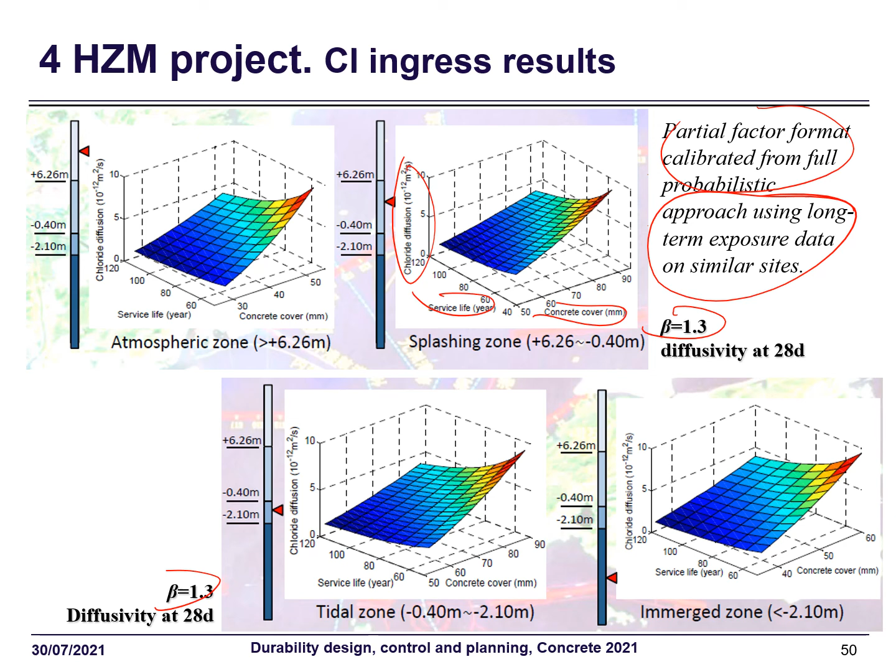When we go to the construction phase, the problem is our value from the model is the diffusion coefficient. But in the laboratory, at the quality control level, we have migration values. These two values are not equal to one another, so we have to make the conversion.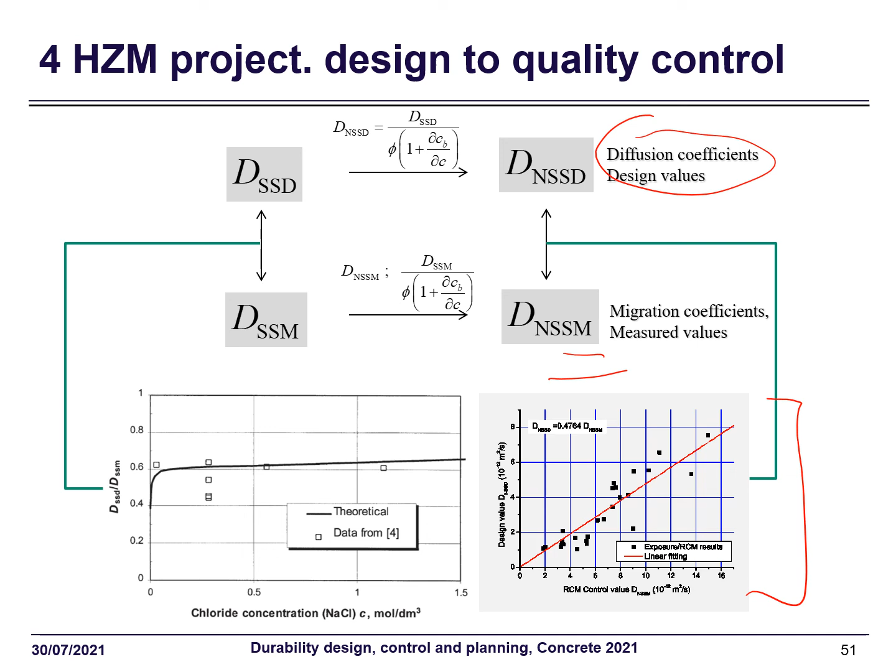That means we reconstitute the long-term exposure specimen in the laboratory, and we redo the migration test on this specimen, and we regress the correlation between the two. In this way, we can convert the design value to a quality control value.

During construction, we collect all kinds of data for concrete cover and chloride diffusivity. We use the same model to update, or to make the durability assessment during construction. Here is the result—you can see that it's always within the design margin.

The only thing is here we have an accidental consideration case. It's not a normal working case—it's a little bit higher. This is the accidental case.

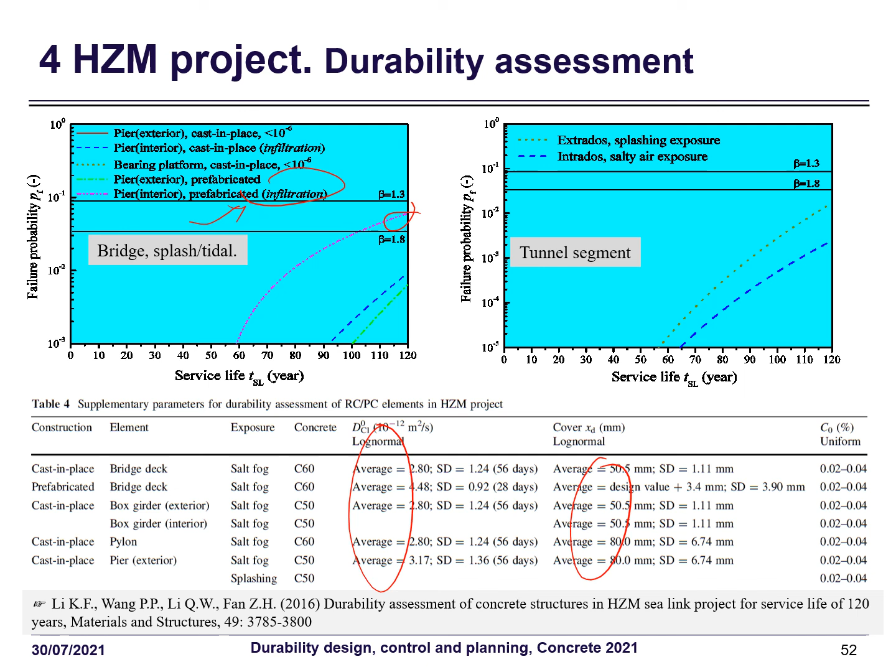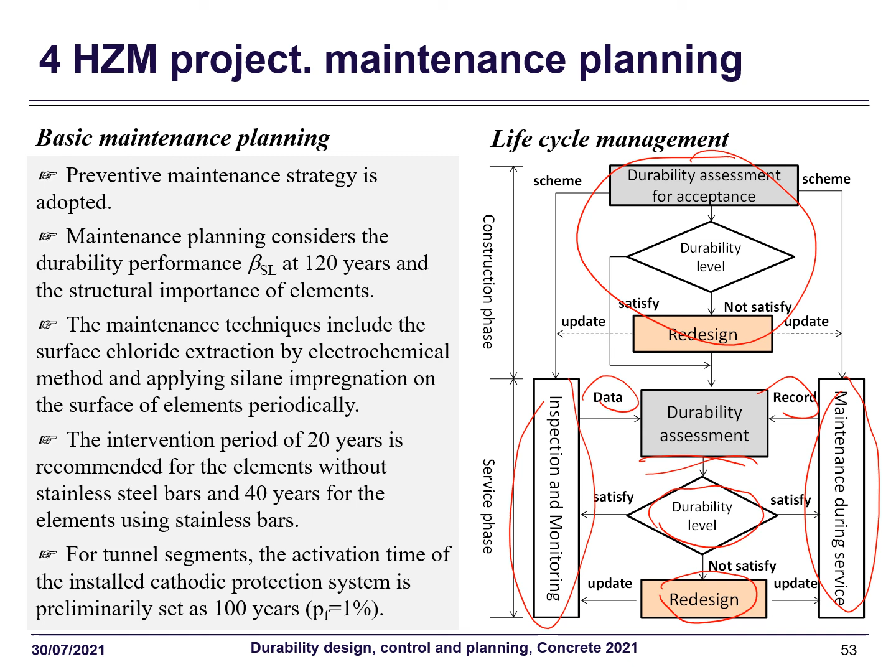Regularly we will activate this durability assessment to see the up-to-date durability level, and then we decide whether we need to redesign the durability or update the monitoring or maintenance works. So that's all the content of my lecture.

So let me conclude my lecture with these words. First, I think that the durability design of concrete structures—the fundamental concepts are widely accepted, and today we tend to incorporate more and more life cycle elements into durability design. That's the trend, I think.

The second thing is rational maintenance design and planning is very crucial, so I think more elements should be incorporated into this design.

And now more and more reliable protection materials and techniques are available, and I think the transition from a one-layer concrete cover strategy to a multi-level strategy is ongoing.

And the last point, by the application to the Hong Kong-Zhuhai-Macau Sea Bridge, we demonstrate how this 120 years of service life is assured—first during systematic durability design, then through quality control in construction, and finally by dynamic maintenance planning during the service phase.